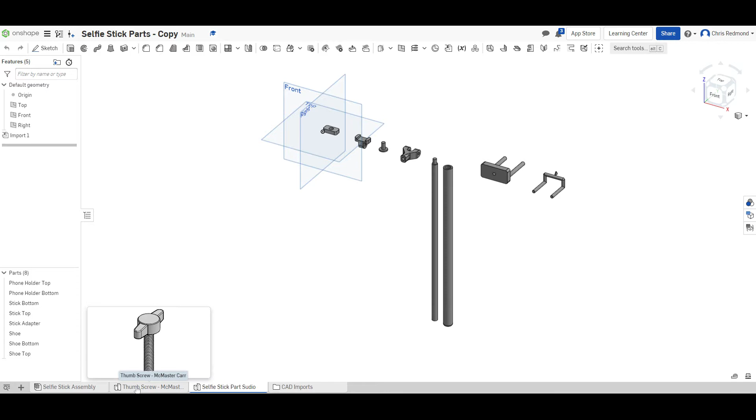All of these parts live inside of this assembly right here, and there's also the part studios that you can check out right here. All the parts are editable if you wanted to play with them, but you shouldn't do that now. We also have a thumb screw part in a part studio that we need to import into our assembly. So we're going to slowly put this together, and we will try and make these selfie stick parts into one selfie stick assembly. This is going to take a while, so be patient, hit pause whenever you need to, and try to do exactly what I do when it's correct.

Now, the first thing we need to do when we're doing an assembly is take our main part and fix it in place. Our main part is going to be this outer sleeve right here. So I'm going to click on it. What you should do is right click on your main part, the outer sleeve, and then fix it in place. Click the fix button, and now this part can no longer move. You see the little red cross thing shows up, says nope, can't do it, can't move it, it's fixed. Now everything else is going to go into and around and attached to this main outer portion.

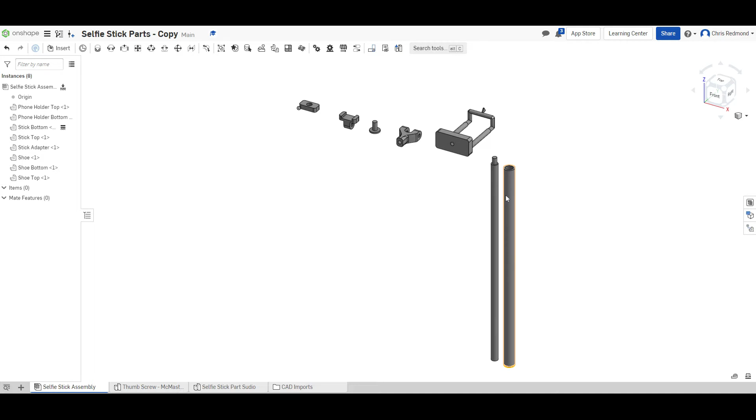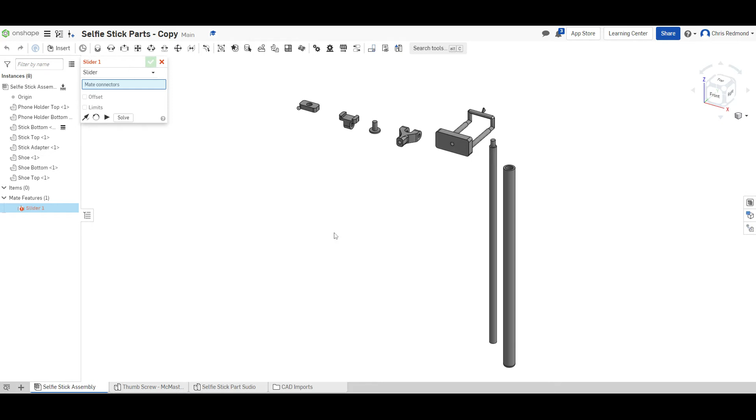We should then put this part into this one. So this inner rod goes into the outer sleeve here. I believe the easiest way to do this is with a slider mate up here. So we're going to choose slider mate in our mate options. Click on it, and I'm going to choose the innermost circle here. Zoom in, choose the innermost circle. I believe you're going to want it - it's hard to tell - we'll just click there.

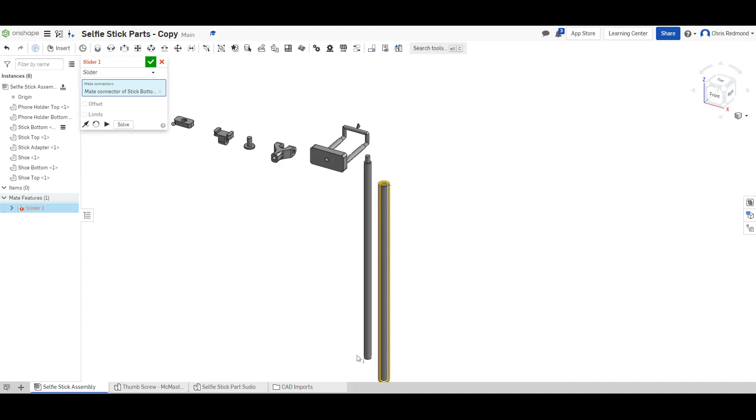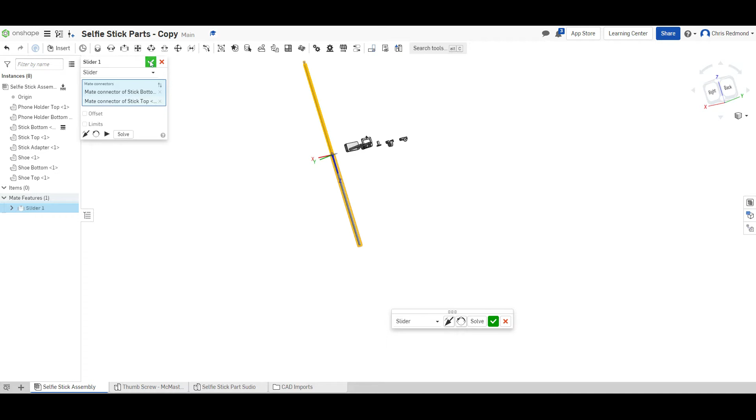Now we want to put in there the bottom of the rod here. I hope we are now in the right place. Yeah, check that out. We'll click the check right here and then close that. So now we have our first part inserted: the rod and the outer sleeve.

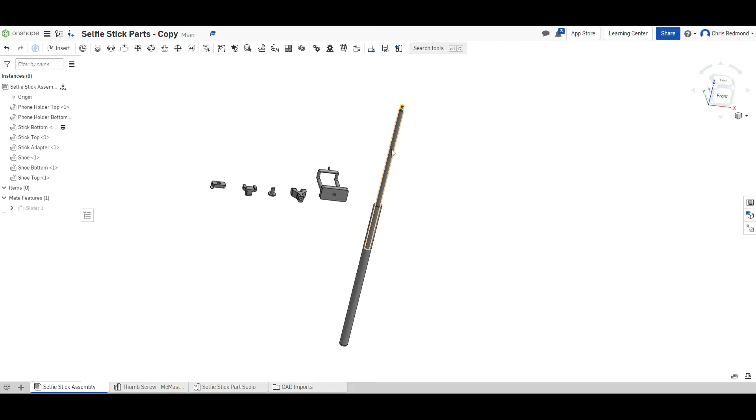Now, we haven't put any constraints on this as far as its motion is concerned. It can't move side to side, but it can move up and down, and it can go too far that way, and too far that way. They're really just locked in place on this one axis. So we should put in some constraints because we don't want it to be able to go too far.

In either direction. So we're going to double click on the slider here and add some limits in. Let's say the minimum will be 0 - can't get smaller than 0 - and then the maximum, put in say 300 millimeters. I'm in millimeters, I don't know if you are as well. If you're not, you can always go up and change what units you're in, in the workspace units menu, like normal.

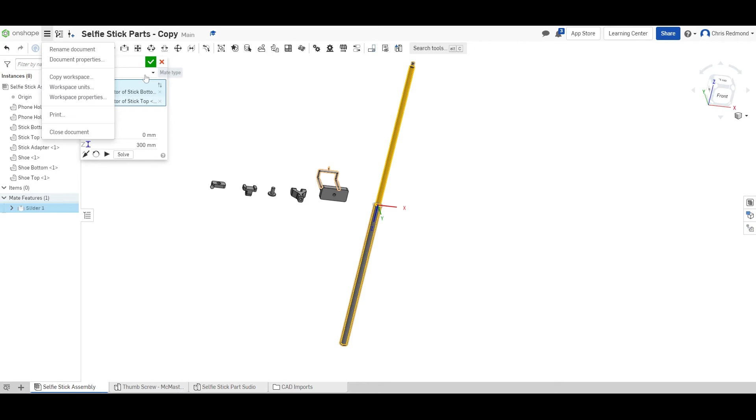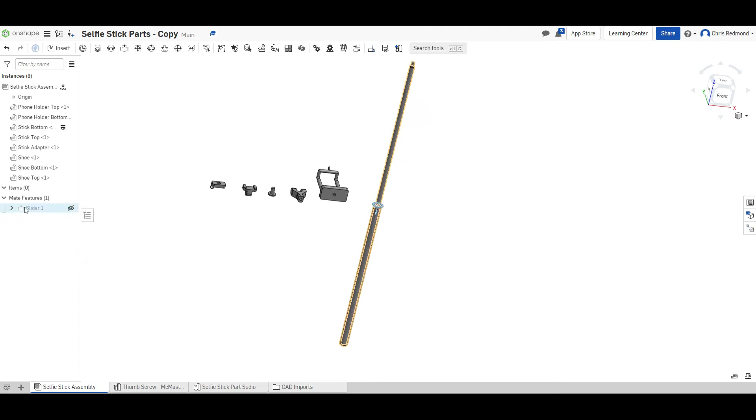So let's see if that works. This is a guess, so I'm going to click check and see if that's good enough. Try and move it down - it's not working. That goes up that way, but that's as far down as it goes. So we were going to want to reverse those limits, turns out. So we'll do 300 up top, we'll do 0 on the bottom. Doesn't like that at all either.

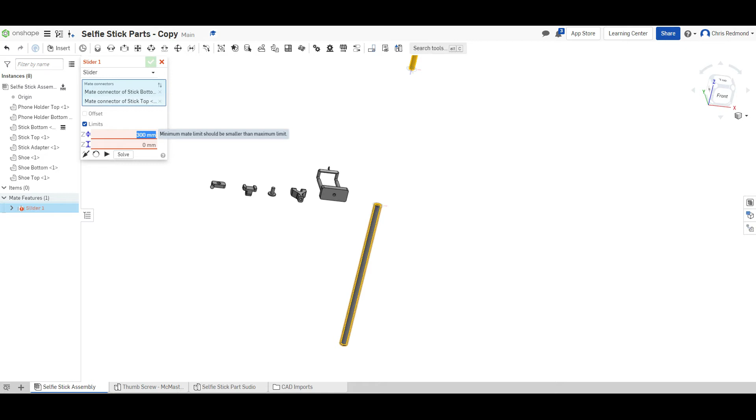Maybe negative 300? Try that. So yeah, check that out. Now it goes all the way down there, and it won't go any further than that. Look at that - now we have a selfie stick with a rod that goes up and down with a limit.

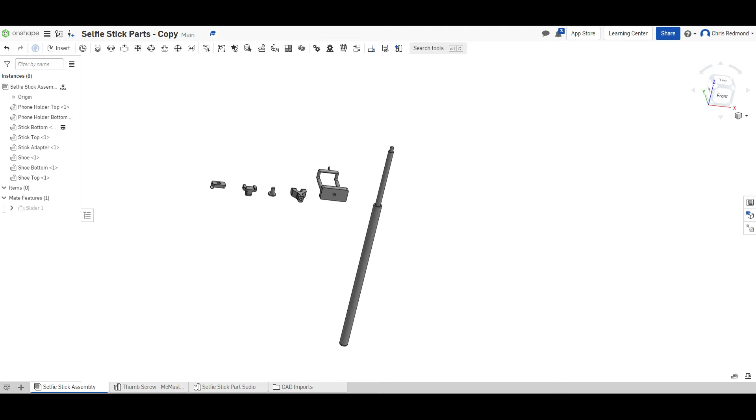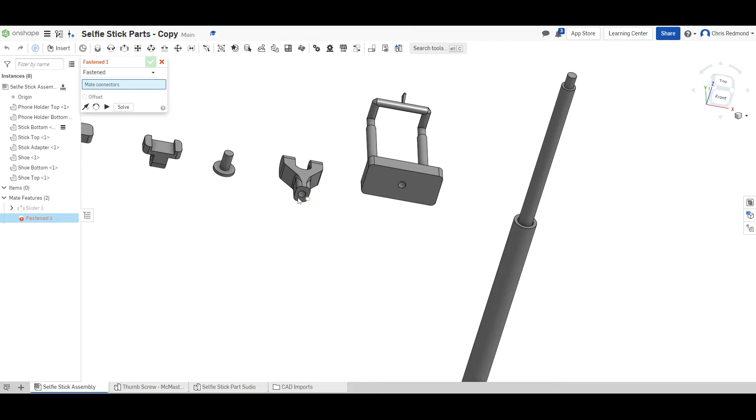Cool. So if you reference the assembly document in blend, you'll see the next part to go on is this sort of Y-shaped component here. This is going to attach into that peg right here. The easiest way to do this one is a fasten. So we will fasten this outer zone here.

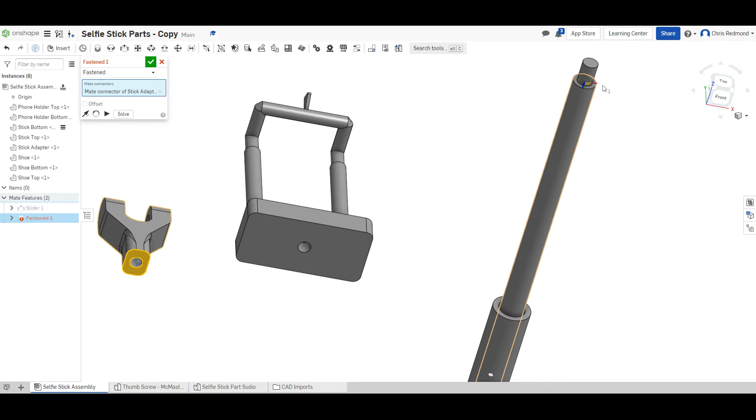And we'll click on the center of it. We want to put that on this portion here, not the peg. We want to put it on this flat portion there. And it sits in a very strange way.

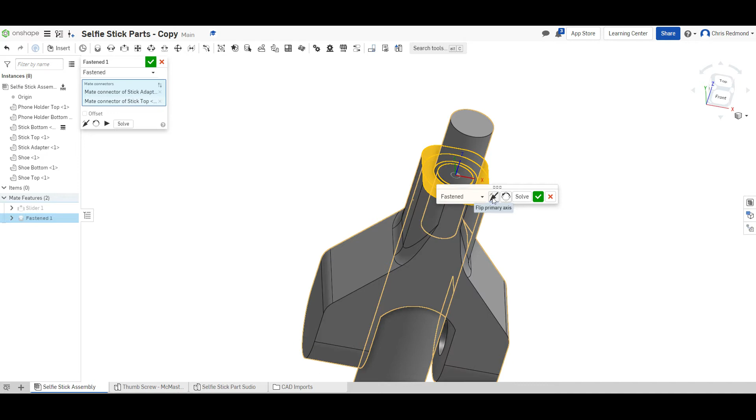So let's reverse it. This will reverse the primary axis, and now it sits on top. Perfect, just like that. We'll click the green check, then the red X. Now we have these two parts together, and they still move up and down, and this one does nothing. It only goes up and down.

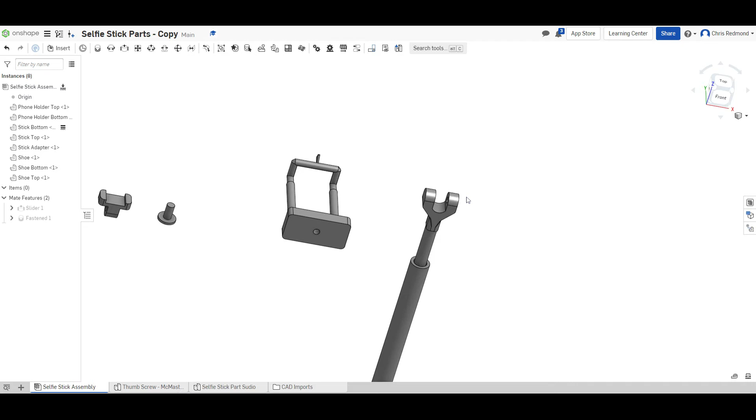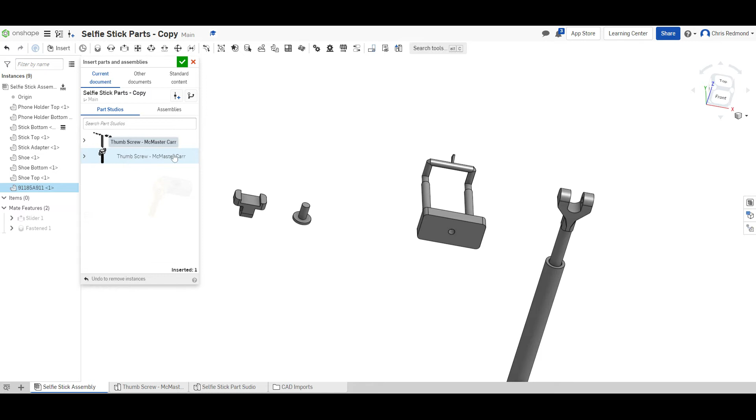Okay, now we'll get to the first hard one. Ooh, you know what we need? We need that extra part that we haven't put in here yet. So let's put in that part. We're going to insert our little thumb screw from our different part studio. Here's the entire part studio from the selfie stick that was already put into your assembly. This time we need to put in this thumb screw right here. So I'm just going to click on it, place it right there, hit the green check, and we're good.

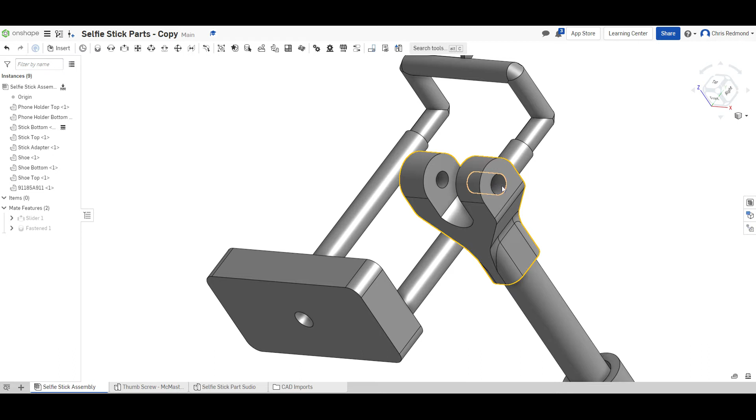So the thumb screw is going to need to go into the hole here. I think it should probably have threads in it, but it doesn't. So the thumb screw is going to go in there. And since this is a cylinder shape and this is a cylinder shape, we're going to do a cylinder mate there.

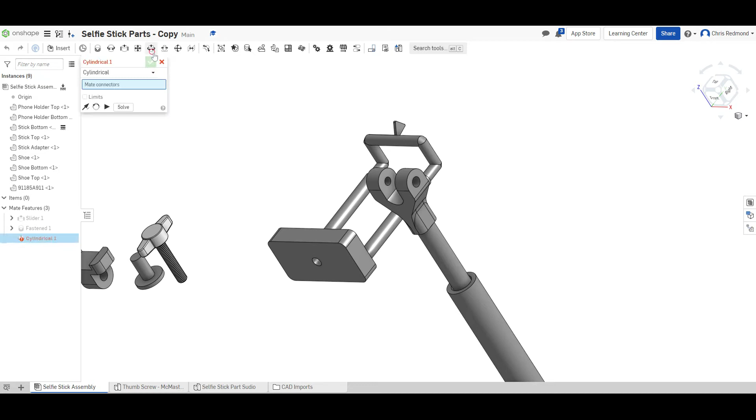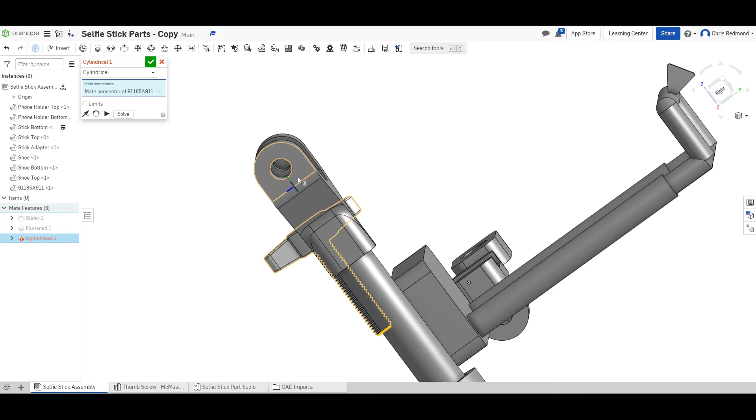So we will take the cylinder here. We're going to take the bottom of this. You zoom in here, you get that. We're going to put it into here. I'm going to try and zoom into the bottom here. I think that'll do it.

And of course it's backwards, so we'll have to hit this, flip the primary axis, and click the green check, and the red X. I think that's good. Let's check it out.

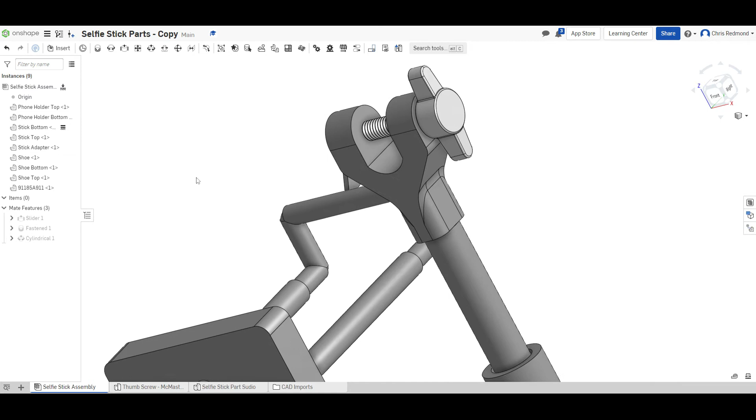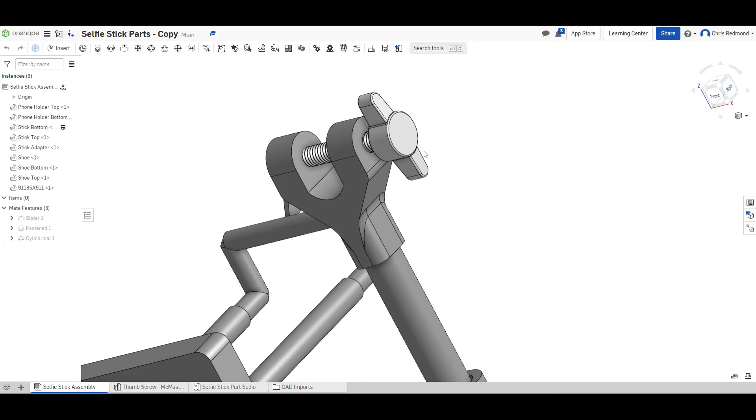So this screw will go in and out, which is pretty cool, but it won't go any further. Oh, it will. Okay, so we'll probably have to put some limits on that in a moment of some kind. But let's not do that quite yet, because I'm going to pull it out here a little bit, since we will then put the next portion in.

Well, let's put those limits on. Let's see what those limits look like. Double click on the cylinder, put on some limits. Put maybe a 0 here. Let's see if that'll do it. Click the check. And yep, it's the opposite way.

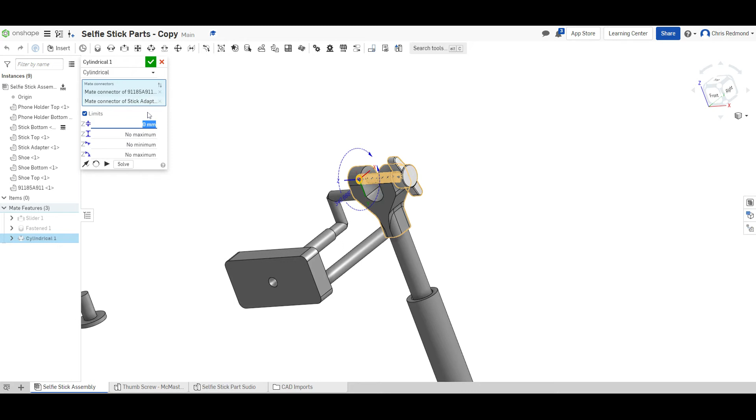Cool, so we're going to double click on the cylinder again, delete that one, and put a 0 on the maximum. See if that works. So now we drag it out, and it will drag out, but it won't go any further than that. There we go. So strange, it kind of seems like it should be the opposite, but the maximum is now 0, and it still rotates, which is fun.

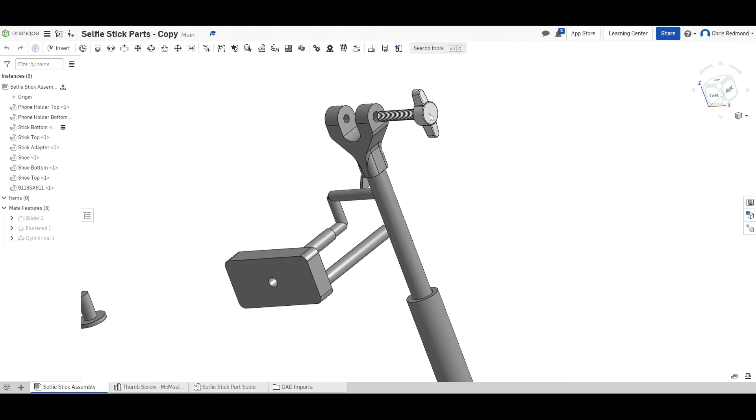We will. Cool, so we're going to stick it out here just a little bit because we need to put in the next piece, which this is going to go through.

This one is very, very tricky, and the reason is there's this circular space on the underneath here, and these flat areas on the side, and a circular space here and flat areas on the side. These two parts, there is quite a lot of tolerance in between them, so we can't mate them together. We can't do a nice fasten. It doesn't have a place for it to click in.

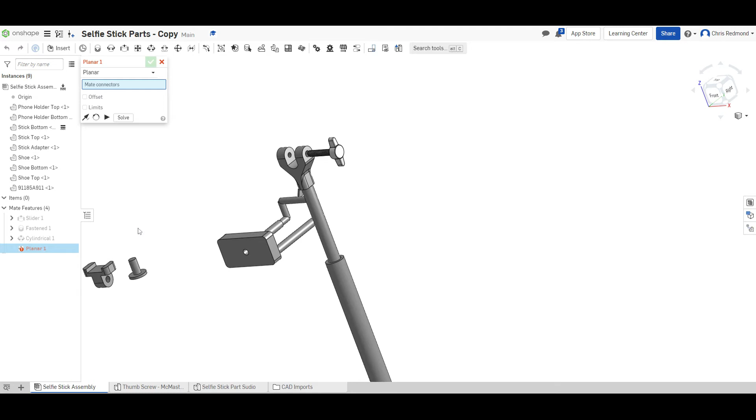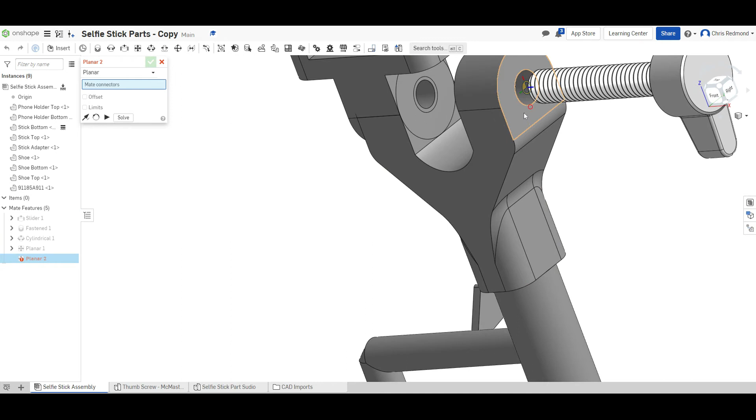But what we can do is a planar mate, which is not a very good way to do this. We do a planar mate, and we take this face here, we're going to mate it to this face here, just like that. We click the check on the solve, whatever that does. And now we need to offset it.

Wonder if we rotate this. So that won't do anything. It's not doing anything either. So we're going to now offset this by a few millimeters. Let's see what happens when we put in 10. Nothing. How bizarre.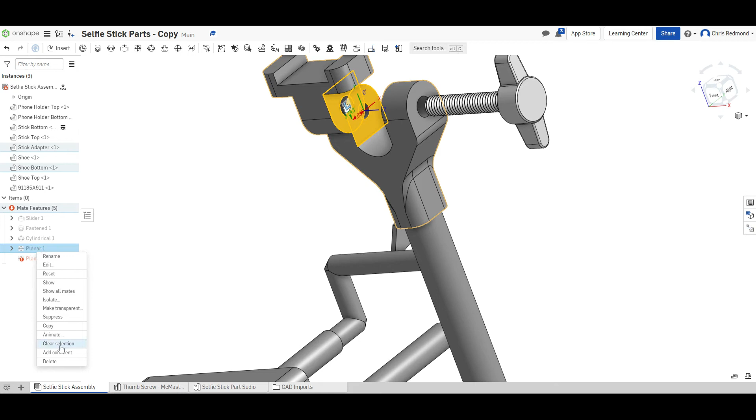Well, this one's not working. So I'm going to click the check, see how it moves. So it kind of moves wherever it wants, and that's not exactly what we want. So what we'll do is we're going to delete this one and try it again. Delete that, move it out of the way, and we'll try another planar again.

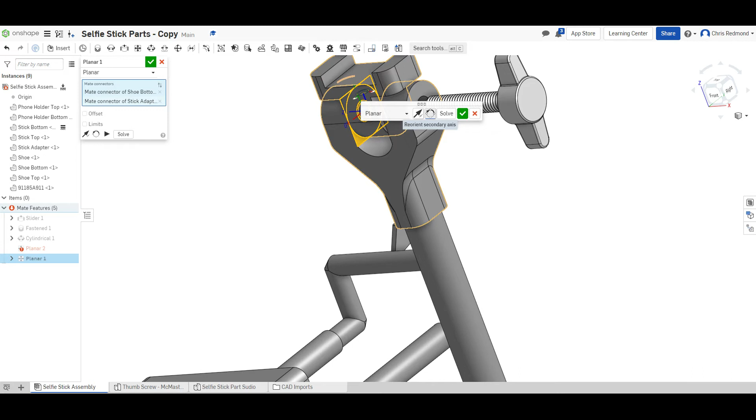So I imagine what happened is something strange. Okay, so what I did was I flipped it and then rotated it a few times until it was in the correct spot. If I hit check, you'll see that that looks a lot better than it did before. But there is still quite a lot of space in between on this side, but no space here. So we're going to want to put that more in the middle. So we will close that.

Why is that one not working? Oh, we're going to delete that. So now we have the planar one.

This part is mated to this part. The T is mated to the Y, but we want to do an offset, so we want to put this more in the middle. So we'll add in an offset here of the Z.

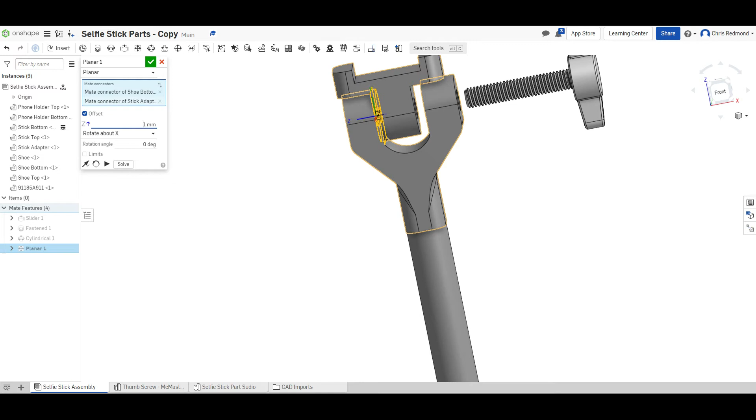Let's see what 1 millimeter is going to do. And see that moved in the wrong direction. So we'll do -1 millimeter and see what that does. That went a little bit too far. So it looks like we're going to need to cut that in half. So we'll do -0.5 millimeters.

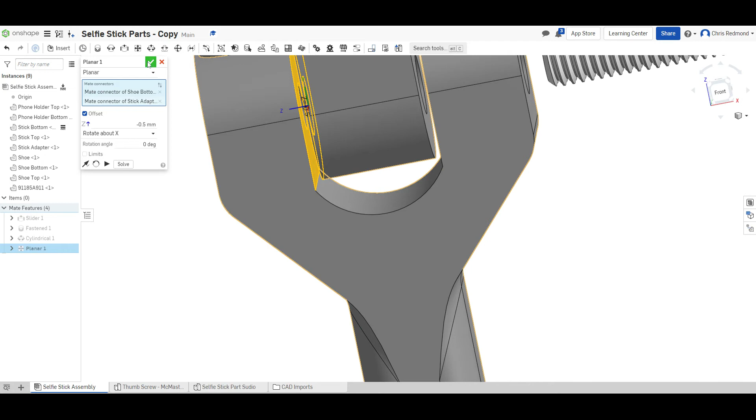And that looks pretty good. Click off, I'll click the check. Not bad, not bad at all.

Now if I start wiggling that around, it's going to go all over the place. Because it's just a planar mate, and planar mates have the most wiggle room. They have the fewest degrees of freedom that have been manipulated.

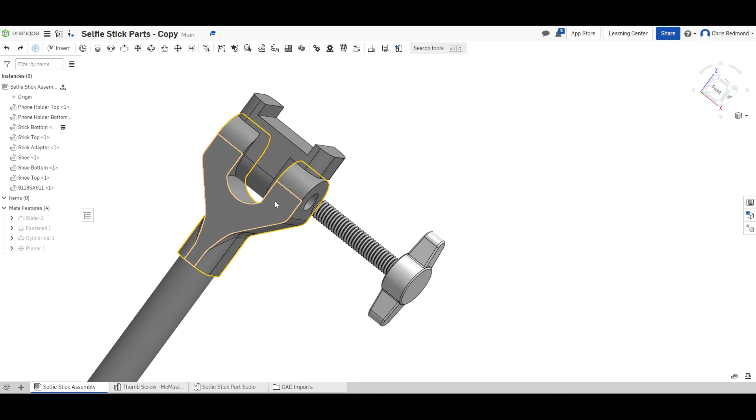So what we're going to want to do now is actually add a slider mate to this part. Sounds interesting and weird, but what we're going to do is use a slider mate on the screw and apply it to the inside of the T part here.

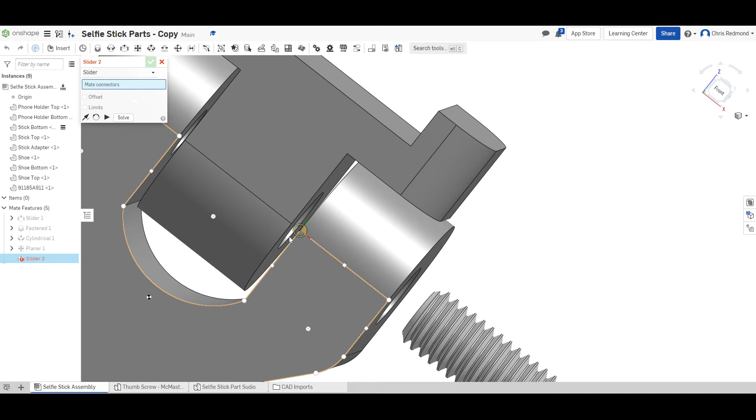So check this out, we'll do slider here. We'll zoom in, try and get the inner circle here. There we go.

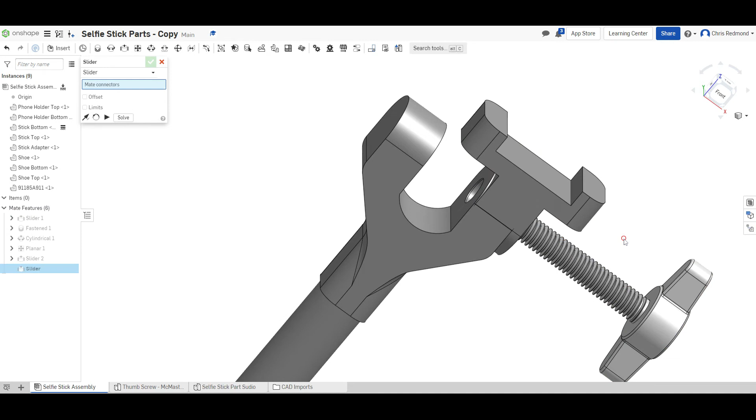Now we'll apply it to the screw. Which part of the screw? Let's try that one. And maybe. Okay, so let's see if that works.

So it moved over in a strange way, but I think it was just a way for you to see inside a little bit better. But if we wiggle this around, you see it no longer allows you to move it off out of place. Now it's a slider that's locked in place with this thumb screw.

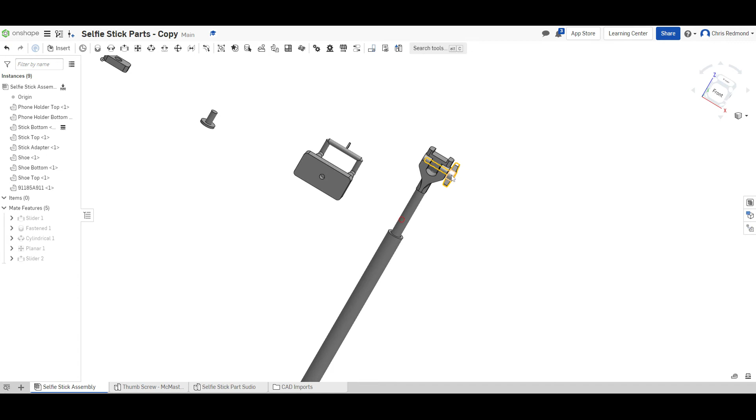I think it's kind of a cheat. I don't know if this is technically the correct way to do this, but at the moment it's working, and that's kind of the whole point of assemblies, to make it look like it works. So this still moves up and down, and this can still come in and out. That's okay.

Okay. So let's keep putting this together. And I'm going to undo that because now I want to be able to get to the top.

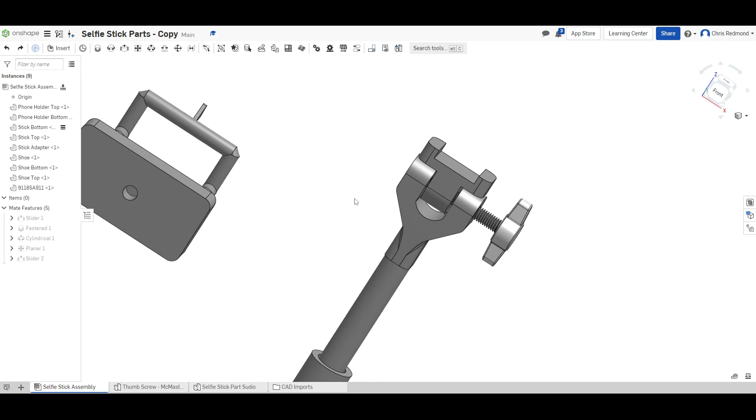So there are a few parts left to put together. We have this peg that sits on the top here, and then this goes on top of that, and then this goes on top of that. It's just kind of a stack of more parts.

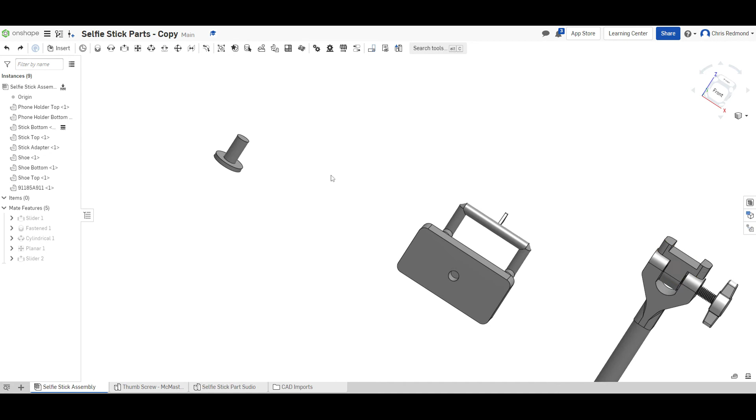So we're going to do a planar mate. We're going to use the bottom plane of the peg, and we're going to put it onto the top plane right here. And it's going to sit there, and it's going to look real nice.

So we'll undo that. I'm going to add some limits, of course. Adding limits to this is really a great way to make things move around a lot less. I'm going to add zeros to this.

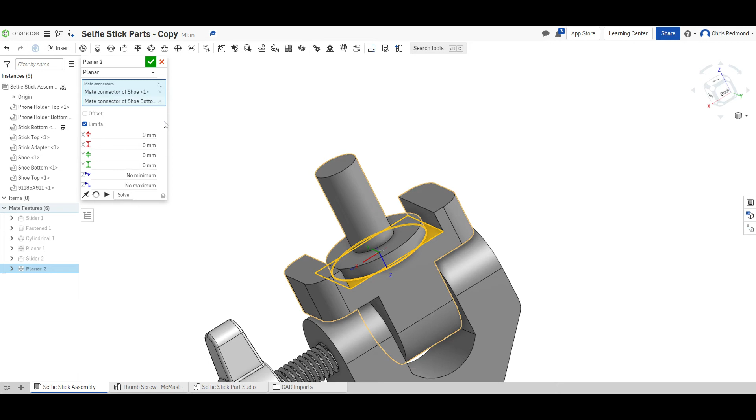So that instead of no minimum and no maximum for the X and Y direction, we're going to add 0, 0, 0, and 0. This is another way to sort of work around this, to keep that and remove some of the degrees of freedom mechanically instead of using the appropriate mates.

Now it is stuck on there because I said you shouldn't be able to move it. Again, not the most elegant solution, but it works right now.

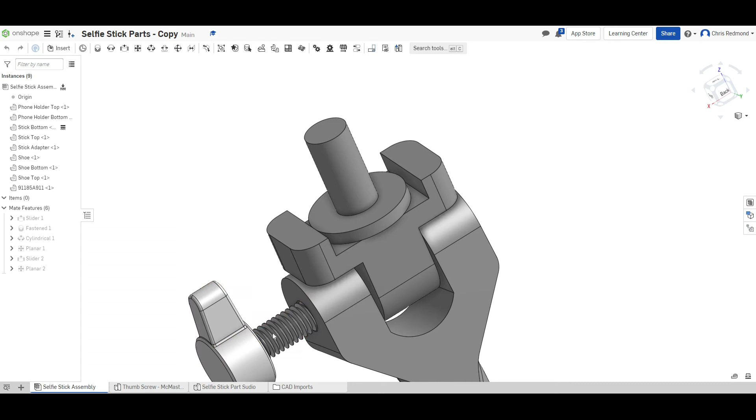Okay, so we have a few things left to do. We have this part here, which kind of just locks. I think mechanically it's supposed to lock the pin in place. It's a little interesting, but it's the exact same size as this top part.

So we're going to do two mates here: a cylinder mate and a planar mate. Cylinder mate, make sure that this is in the correct orientation right on top of there. And then the planar mate is going to lock the rest of the degrees of freedom in.

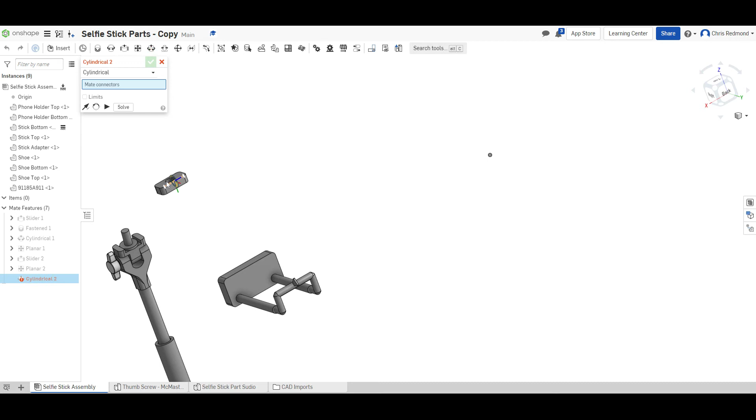So we'll take a cylinder mate here and we will orbit a little bit. We will choose the very top of the pin. And then we're going to choose the center hole of this block here.

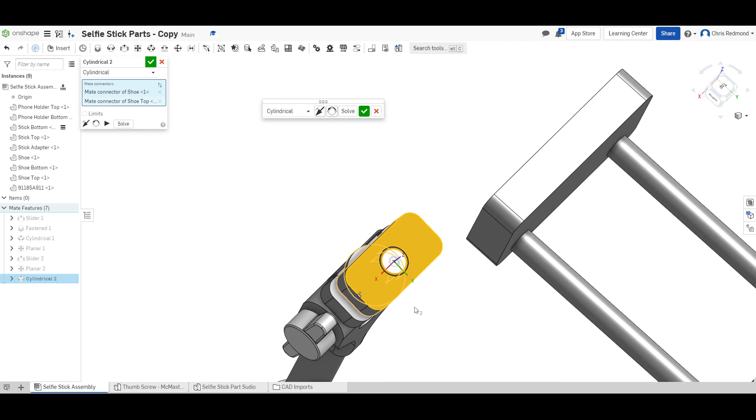That should have moved right into place. Looking good. That looks fine. It's not in the exact right location, but we can manipulate that here in a moment. It's a cylinder mate, so this should still be able to move around a whole lot.

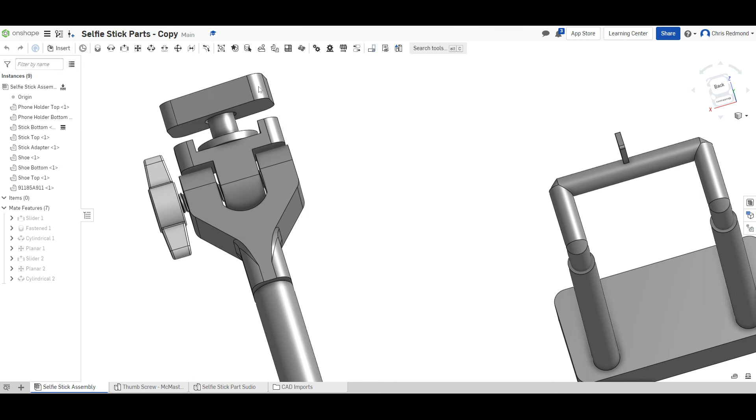Spins and it goes up and down. So we're going to want to lock this surface in on top of that surface. So we're going to use a planar mate for that.

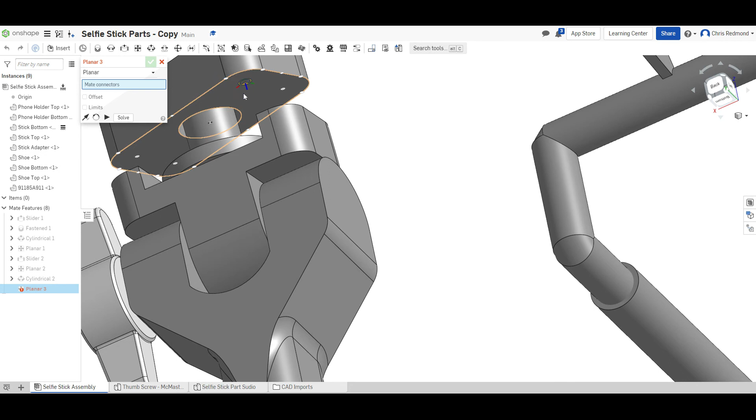Mate those two planes. So we'll get underneath, click on this. We'll lock that into this plane here. Having a mouse and being able to orbit is critical here. Click there and click the green check.

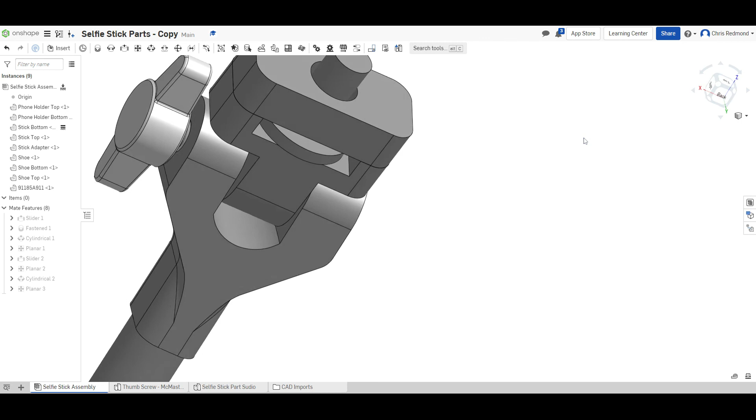Close that one. Cool. So look how fancy that's looking. Everything is locked in place. I can move the whole thing up and down. It still wiggles around.

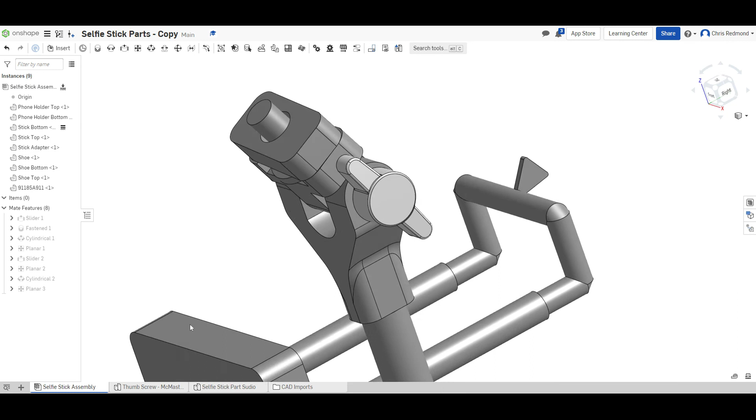Nice. Okay, so looks like it's a little off, but it doesn't look too bad. I wonder if we can do a parallel mate. Where's that one? Right here. That and that. Nope, that's not what we want. Undo that.

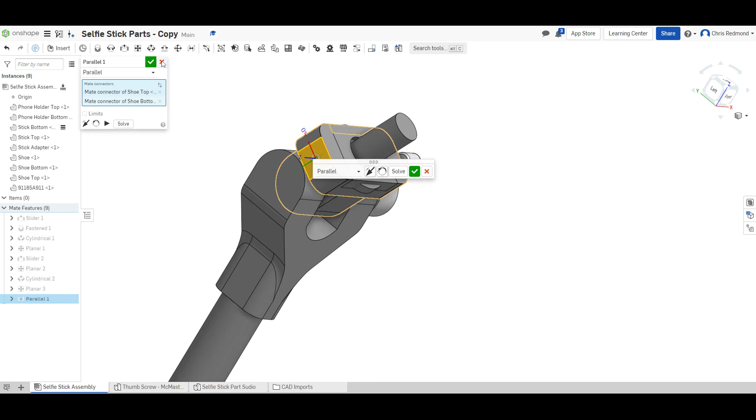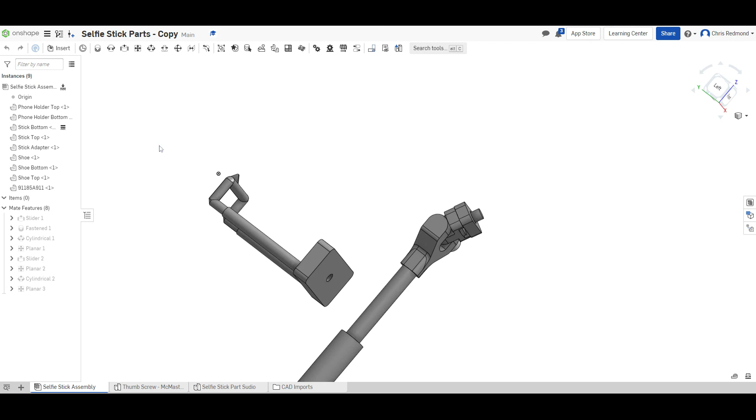Any rate, final part is getting this locked in place on top of that. Something funny is going to happen because you've been looking at these parts and it looks like one object. However, it's two. I thought it was one object the entire time.

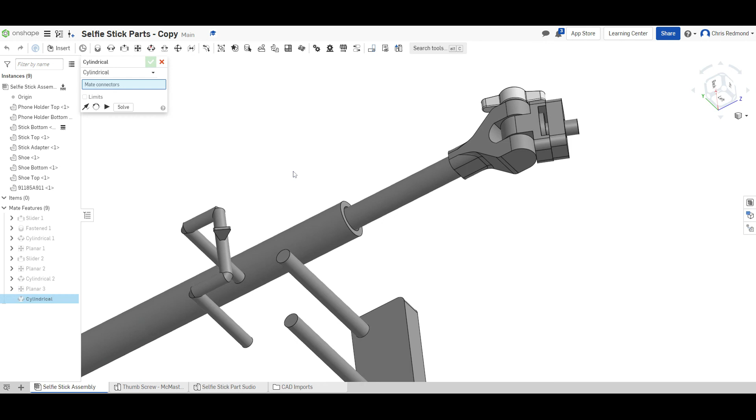So let's lock this one in place onto this real quick. It's pretty easy. We're going to do two cylindrical mates here. Choose where to go. Here we go. Choose this top here. Put it on the bottom there. That moves it into place.

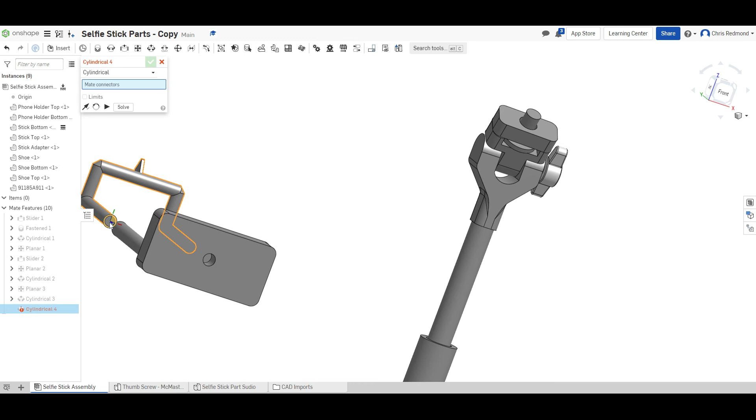Great. We're going to do another cylindrical mate real quick. Move this up a little bit. Because it can still move in a couple directions, we don't want it to. We're going to mate this one here to this one here. And there we go. Close that and close that.

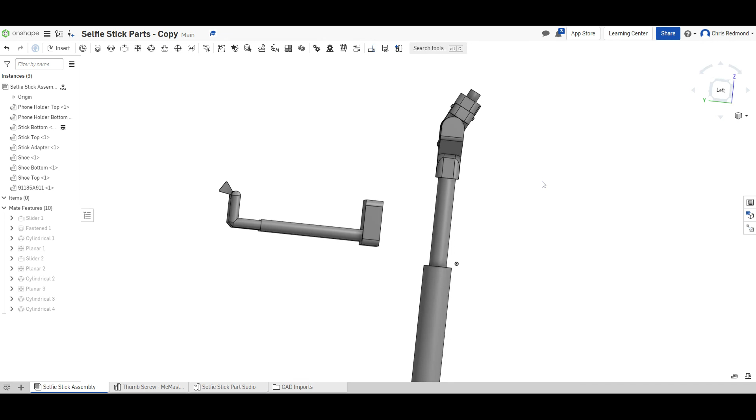Now, what we have is this piece is now locked in place, kinda, enough, I suppose. So, from what I can tell, we're going to do a pretty similar job that we did with this plate on top of the T slot, which is a cylindrical mate and then a planar mate.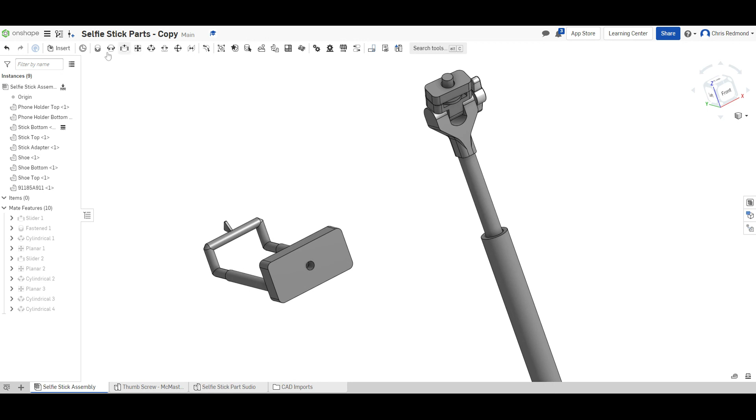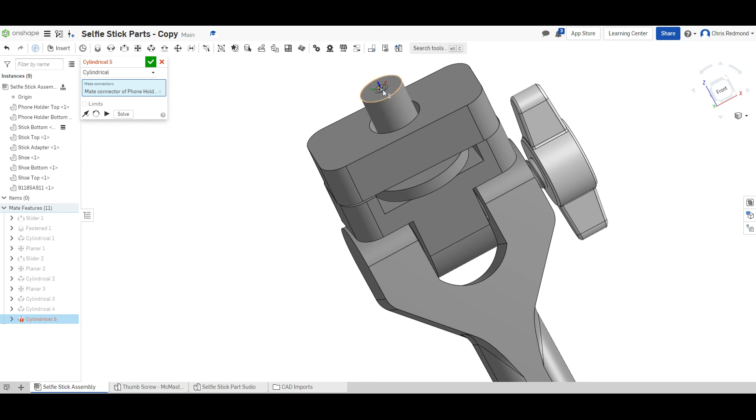Very similar as what we did before. So let's do another cylinder mate. We'll get the bottom here, not the very top, I think the bottom. Mated with the top of the peg. Just like that. And it's upside down, and that thing flew off.

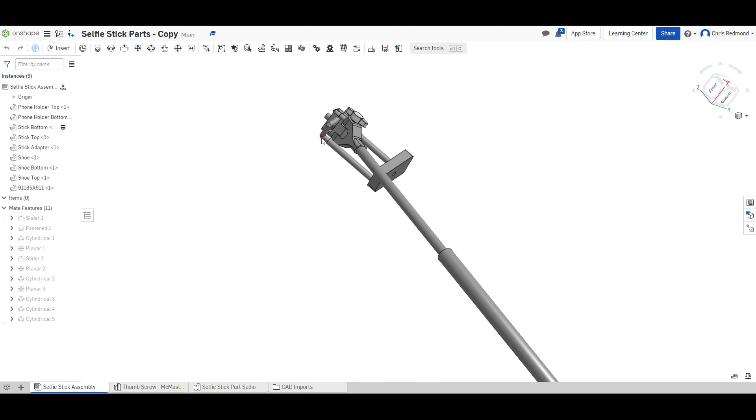Hopefully this will solve. Let's flip it, see if that helps. There we go, there we go. Click check, and we're good. Why in the world is this over here? Make that go away. I have no idea. How bizarre.

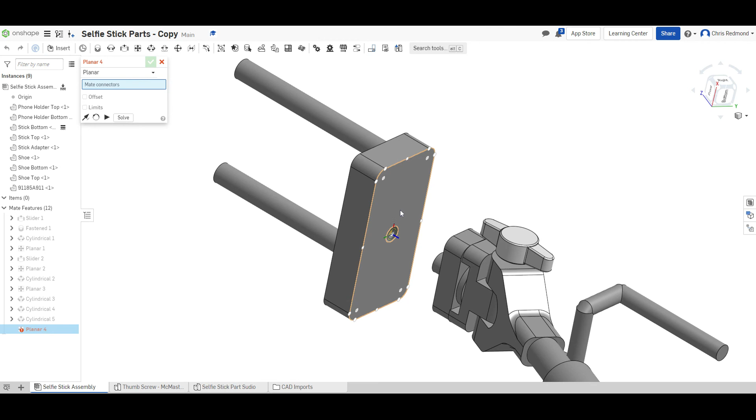So let's do a plane. Let's try and get this looking a little bit more normal before we solve this one. We'll do a planar mate of this surface onto this surface. Click the check. Looking fine. All right, now, how do we get this in the correct location?

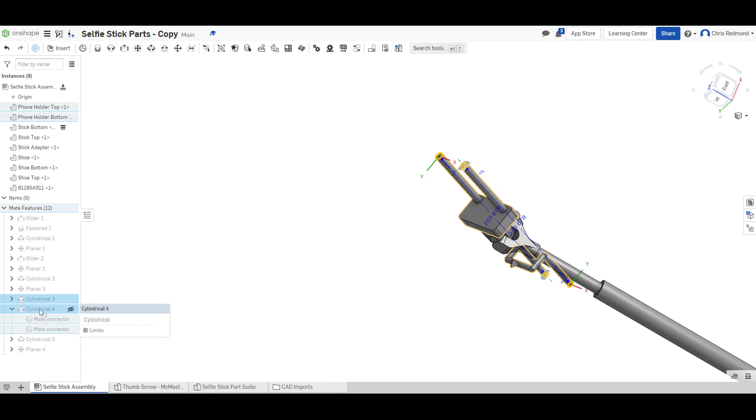Let's try this. So let's delete cylinder 4. It should now be free to move. It's not.

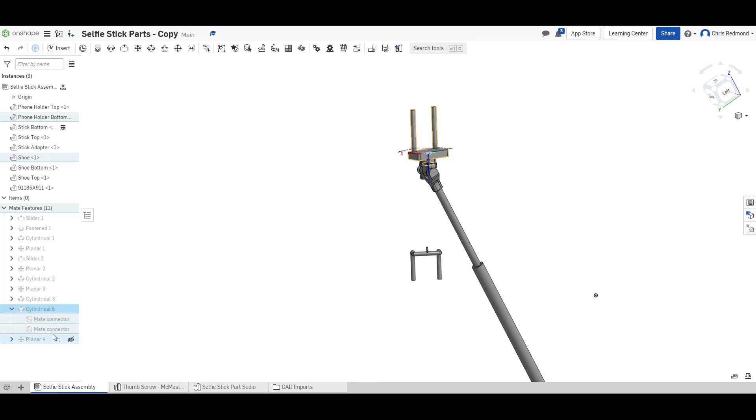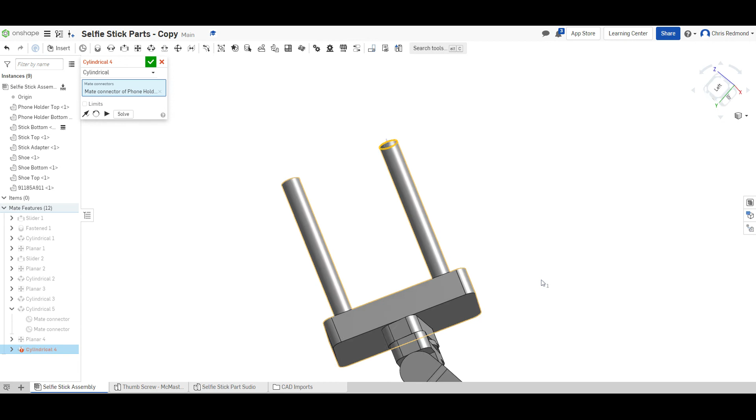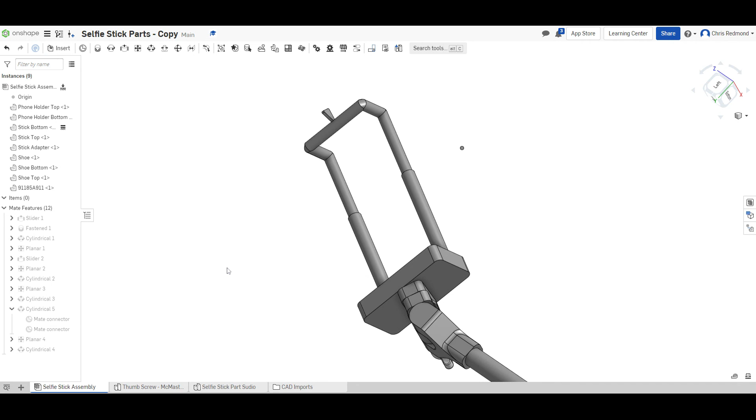And let's try and, I suppose, mate those cylinders back together. Do a cylinder mate on the top of here and find the bottom of that little handle. Whoop, that seemed to do it. How strange. Okay, click the check there, and we have a mostly assembled selfie stick.

This moves up and down. That stays there.

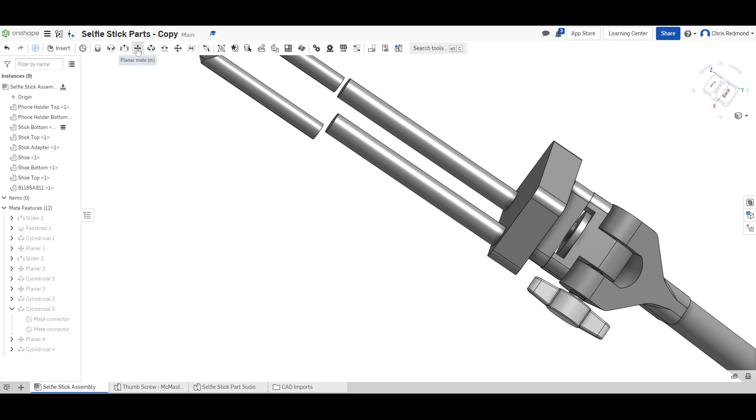I wonder if we pull that apart, we can do a planar mate on here and here. That'll help. And it does. Look at that.

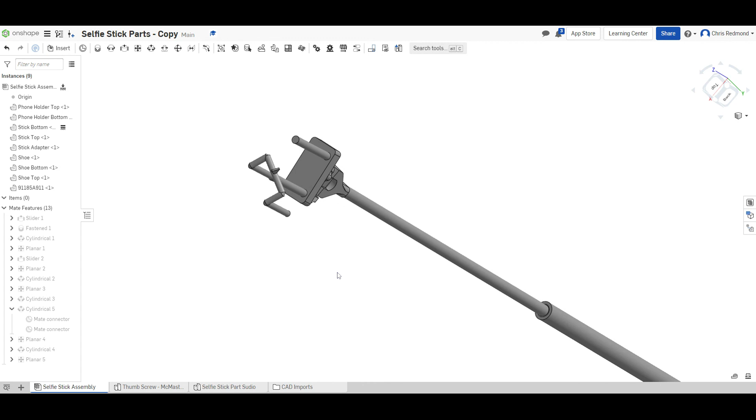So this can rotate a little too much. But hey, it's a selfie stick. These things are supposed to be able to come apart a little bit.

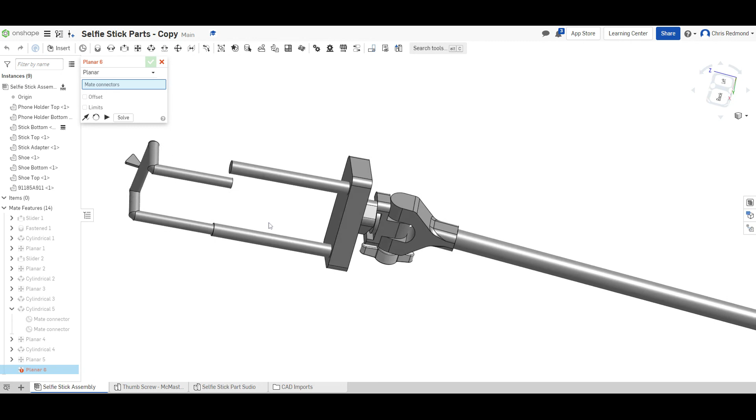And you can play with this as much as you'd like and make this just kind of work. Doesn't like that. At any rate, we have a selfie stick.

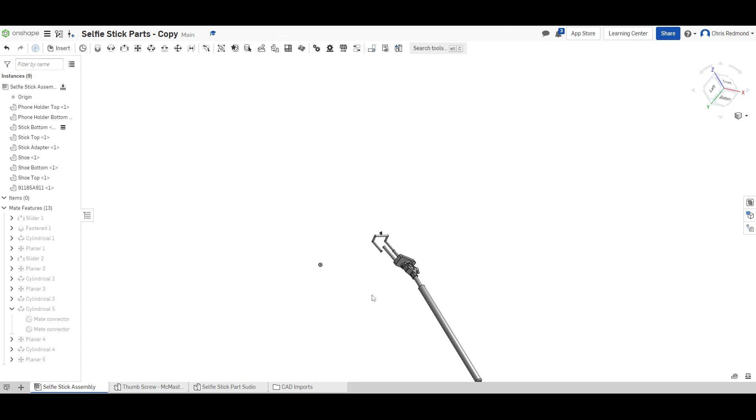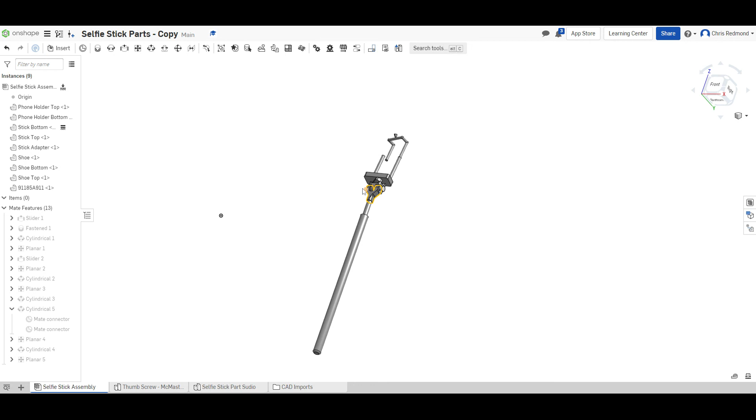Thanks for watching and playing along, and good luck assembling. It's an interesting part of 3D design and easily one of the more complicated parts. It's a big puzzle, and so any of these can be changed and manipulated to serve you better if you need to. But putting in limits is an easy way to work around some of the problems you might be having. And again, it's going to be trial and error most of the time. Okay, thanks for watching.